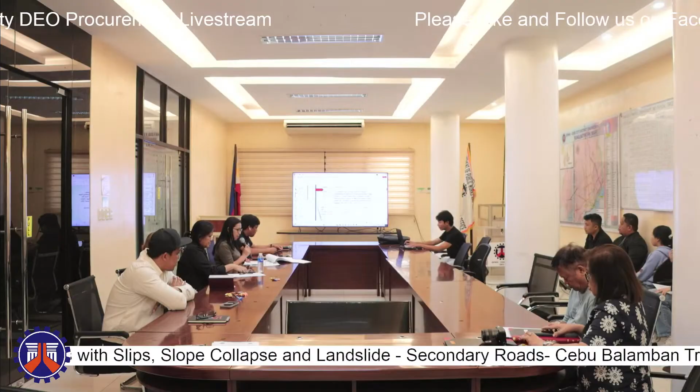For the BAC members, we have Maria Dolores B. Salazar, Maria Luz Di Benzuela, and Jafet M. Salara. For the BAC secretariat, we have Fritz Andrew G. Asignar, Winmar R. Pelenia, Sarabel Sulib, and Marilu T. Avila. For the technical working group, we have Kenny Luis Di Mansueto, Reynaldo B. Padillo. That's it, okay.

And Kenny, yeah, I've already mentioned Engineer Mansueto. Okay, so we have no visitors from the construction firms, probably online.

Okay, so we will now proceed with the discussion of the different contract IDs. May I request the programmers and designers.

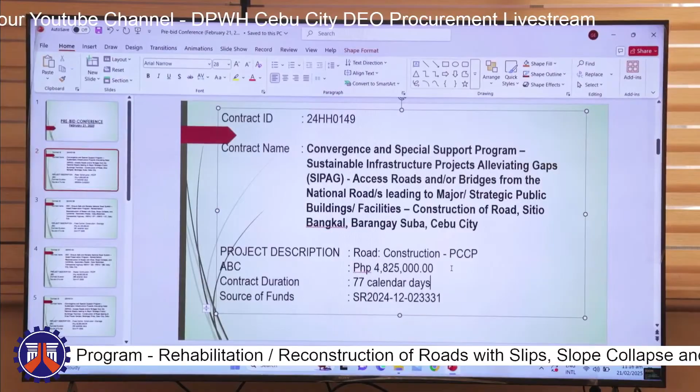Good morning, everyone. For the first project, we have construction of road in Barangay Suba, Cebu City, with contract ID 24HH0149, contract name Convergence and Special Support Program, Sustainable Infrastructure Projects Alleviating Gaps, SIPAG, access roads and or bridges from the national roads leading to major strategic public buildings, facilities, construction of road, Sitio Bangkal, Barangay Suba, Cebu City. Project description: road construction, PCCP, with an approved budget of 4,825,000 pesos, contract duration of 77 calendar days, and source of funds SR 2024-12-02-3331.

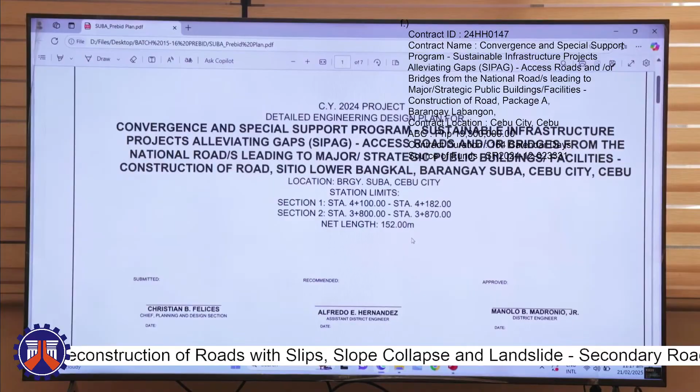For the major scope of works for this project, there are two sections. Section 1, station 4100 to station 4182, and Section 2 with station limits of 3800 to 3870, with a total net length of 152 meters.

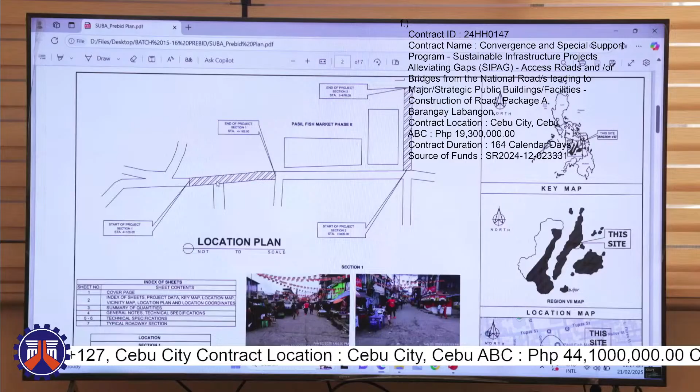For the second page, we can see here the location plan. The project is located near Pasil Fish Market Phase 2, in between Phase 2 and Phase 1. Section 1 is located at the Cebu City Fish Port. So here are the sections, Section 1 and 2.

For the major scope of works, we have surplus common excavation, pipe culverts and drain excavation, gravel fill, subgrade preparation, aggregate subbase course, PCCP with a thickness of 250 mm and 3 days curing period, and reinforcing steel, structural concrete, metal frames and gratings, reconditioning of drainage structures, manhole, and concrete cover.

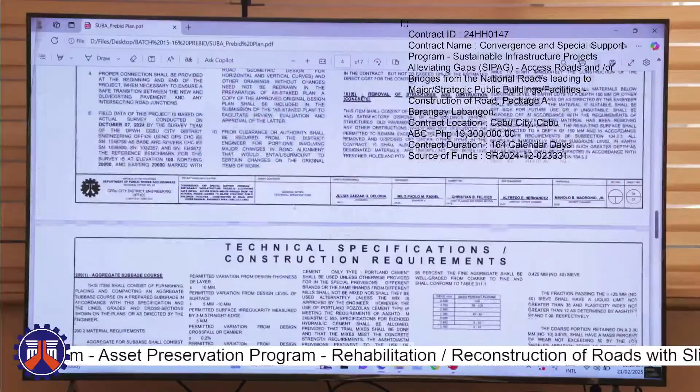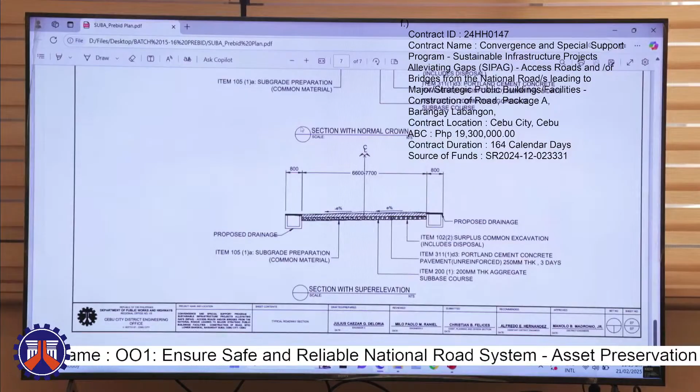For the next page, we have the general notes and the technical specification of every item. For the last page, we have the typical road section. The items included are item 1022 surplus common excavation, item 311 D3 for the PCCP with thickness of 250 mm, 3 days, and item 2001 aggregate subbase course. We also have the proposed drainage with a width of 800 mm. That would be all for the Barangay Suba Road Construction Project.

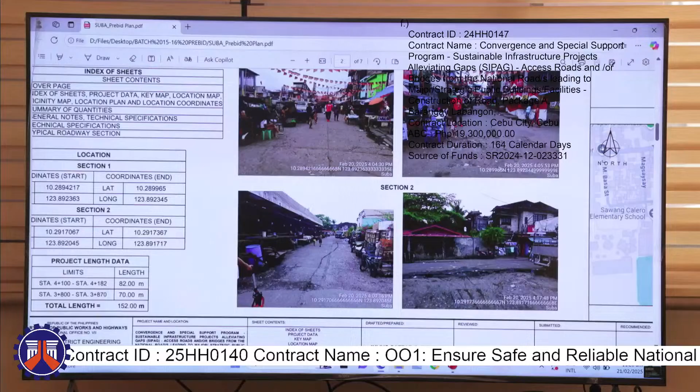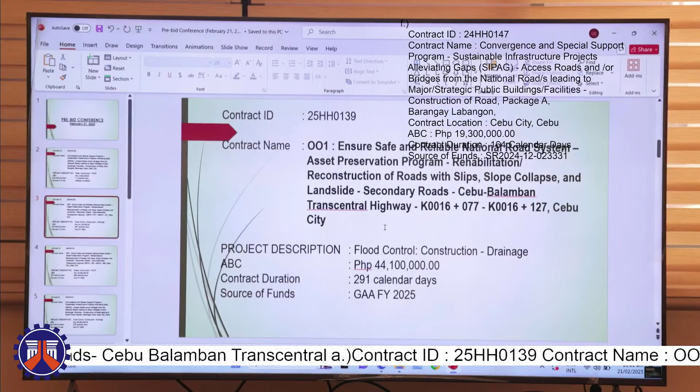Good morning. I'm here to discuss our next project with contract ID 25HH0139, contract name OO1 Ensure Safe and Reliable National Road System Asset Preservation Program, Rehabilitation, Reconstruction of Roads with Slips, Slope Collapse, and Landslide, Secondary Roads, Cebu, Balamban, Trans Central Highway, kilometer 16 plus 077 to kilometer 16 plus 127, Cebu City.

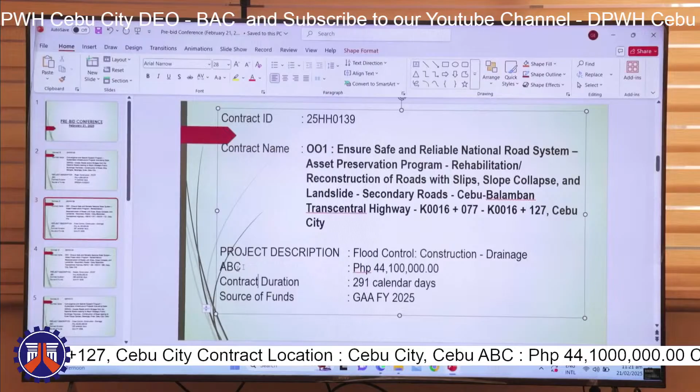Project description: this is a slope protection project. Our approved budget of the contract is 44,100,000. Contract duration is 291 calendar days. Our source of fund is GAA FY 2025.

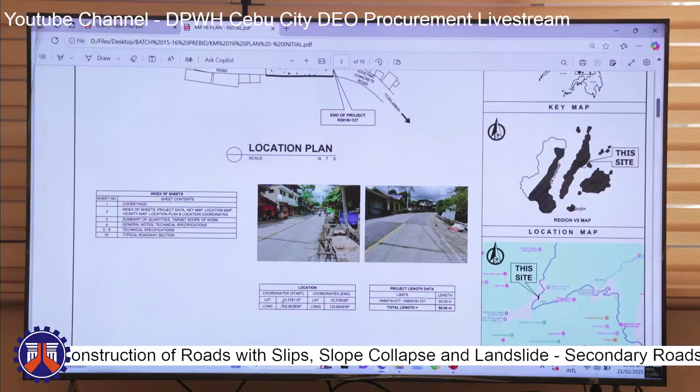This project calls for the reconstruction and rehabilitation of existing roads with slip, with the purpose that the foundation will lie on stable grounds, likewise utilizing the part of the slipped pavement alignment as the detour road. The target scope of work of this project is to remove the existing slipped pavement, reconstruct and maintain it as detour until the duration of the project, which is to be extended up to the end of the slip section to provide safety to the traveling public.

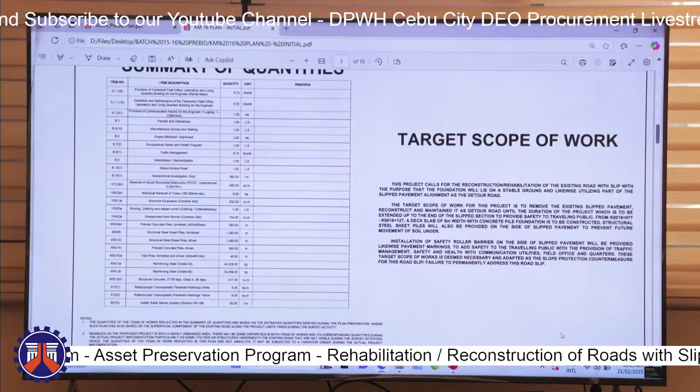From kilometer 16 plus 077 to kilometer 16 plus 127, a deck slab of 8-meter width with concrete pile foundation is to be constructed. Structural steel sheet piles will also be provided on the side of the slipped pavement to prevent future movement of soil underneath.

Installation of safety roller barriers on the side of the slipped pavement will be provided. Likewise, pavement markings to add safety to the traveling public, with the provision of traffic management, safety and health, communication utilities, field office and quarters. This target scope of work is deemed necessary and adopted as a slope protection countermeasure for this road slip failure.

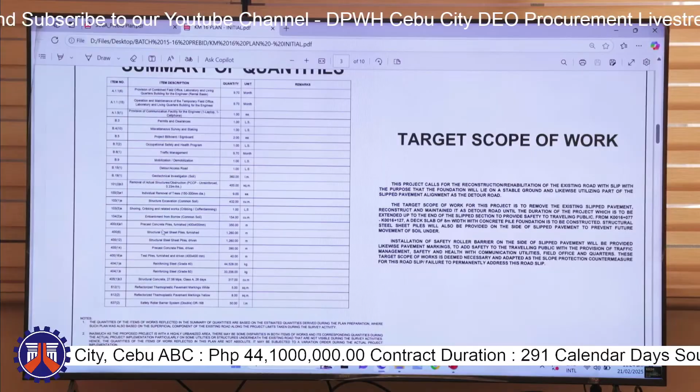This one, we have our precast concrete piles, this one, and structural steel sheet piles.

Next, we have our general notes and technical specifications. And lastly, our typical road section, this one.

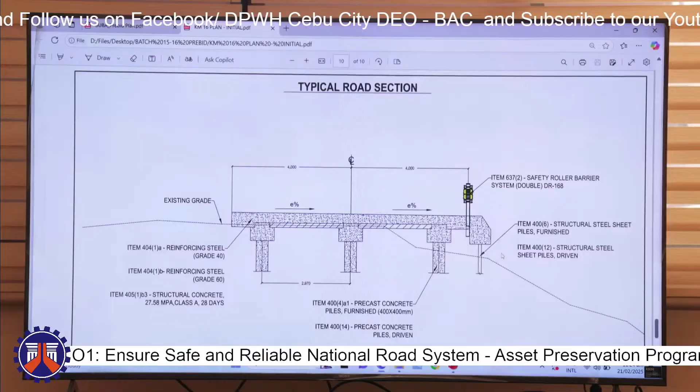We have our deck slab here at the top. This one, our concrete piles. Then we have our sheet piles at the side. Then we have there our safety roller barriers.

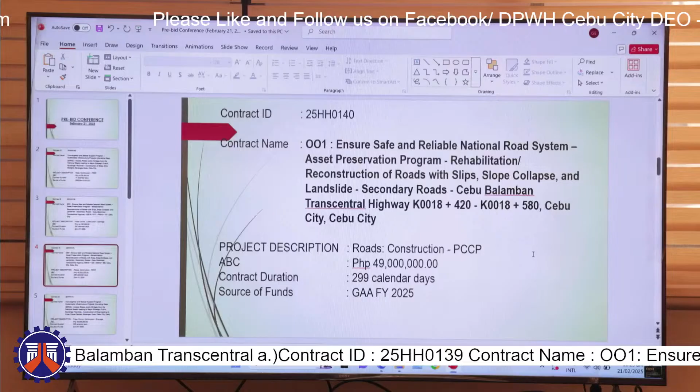The next project is contract ID 25HH0140 with contract name OO1, ensure safe and reliable national road system, asset preservation program, rehabilitation, reconstruction of roads with slips, slope collapse, and landslide, secondary roads, Cebu, Balamban, Trans-Central Highway, kilometer 18 plus 420 to kilometer 18 plus 580, Cebu City, with an ABC amount of 49 million. Contract duration of the project is 299 calendar days, and source of fund is GAA FY 2025.

So the net length of this project is 160 meters. Here is the project location of the project.

So the current condition of the site is, this project is a continuation of our 2021 project. So here are the not yet updated photos.

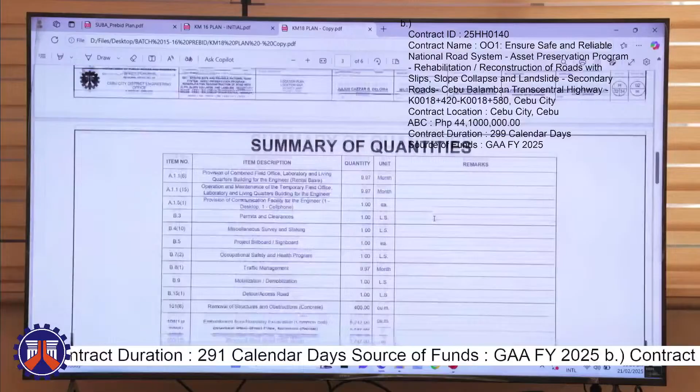For the summary of quantities, we have combined field office and operation and maintenance of the temporary field office, provision of communication facility for the engineer, permits and clearances, miscellaneous, survey and staking, project billboard, signboard, occupational safety and health program, traffic management, mobilization, demobilization.

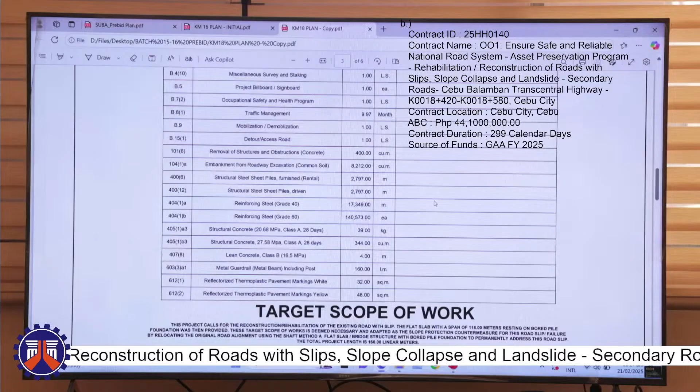We also have detour and access road, removal of structures and obstructions, embankment from roadway excavation, structural steel sheet piles driven, reinforcing steel, structural concrete, lean concrete, metal guardrail, reflectorized thermoplastic pavement markings.

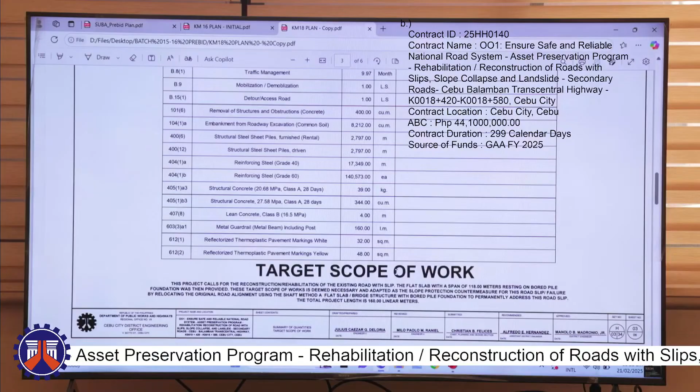So the target scope of work, this project calls for the reconstruction rehabilitation of the existing road with slip. The flat slab with a span of 118 meters resting on bored pile foundation was then provided. This target scope of work is deemed necessary and adopted as the slope protection countermeasure for this road slip by relocating the original road alignment using the shaft method and a flat slab bridge structure with bored pile foundation to permanently address this road slip. The total project length is 160 linear meters.

So this project, the CY 2021 scope of work is the bore piling. This project is the superstructure na siya, the flat slab na lang.

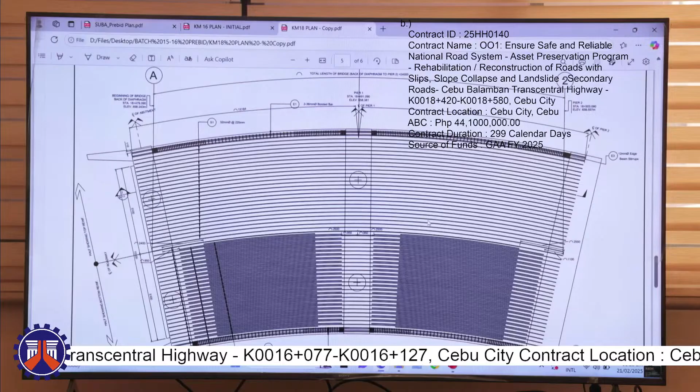So here's the general notes. The slab reinforcement. So here's the typical cross-section of the project.

So that's it for kilometer 18. Next one is...

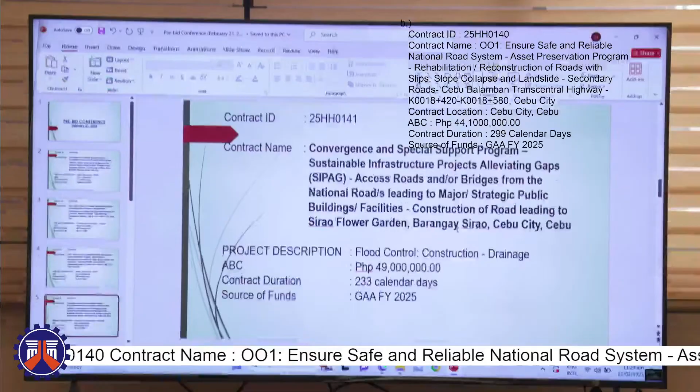Good morning, everyone. So I'm here to discuss the project with contract ID 25HH0141 with contract name Convergence and Special Support Program, Sustainable Infrastructure Projects Alleviating Gaps or SIPAG, access roads and or bridges from the national roads leading to major or strategic public buildings or facilities, construction of road leading to Sirao Flower Garden, Barangay Sirao, Cebu City.

Forgive us, but the project description for this one should be roads, construction of PCCP, with an approved budget of 49 million and contract duration of 233 calendar days, with its source of funds being GAA FY 2025.

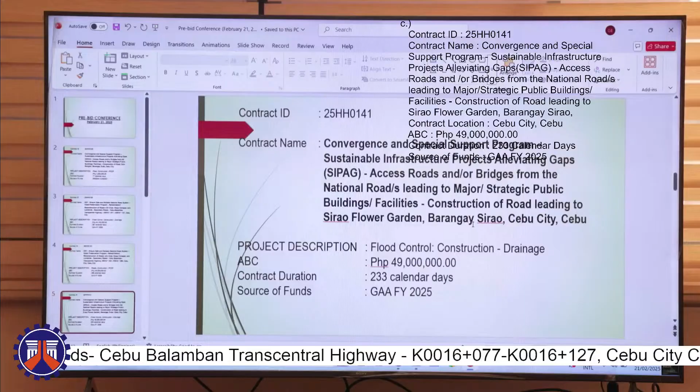So for our station limits, this starts at station 21,000 until station 21,962, with a net length of 962 meters.

Here you will see the location of our project. So basically this starts right before, or like this is the road leading to Sirao Garden, and it ends near Veco, just before the Sirao Flower Garden.

You will also see here the coordinates of the start and end of our project for easy navigation to our site.

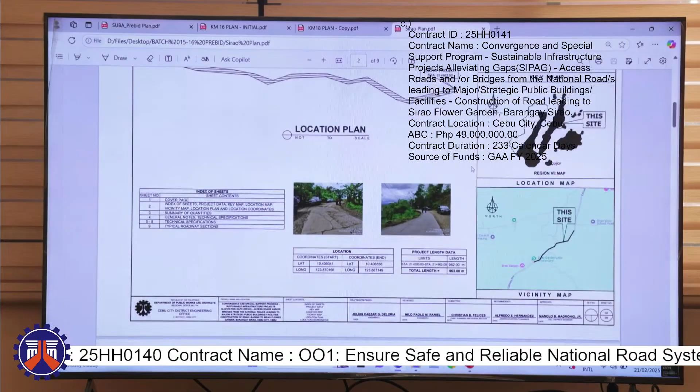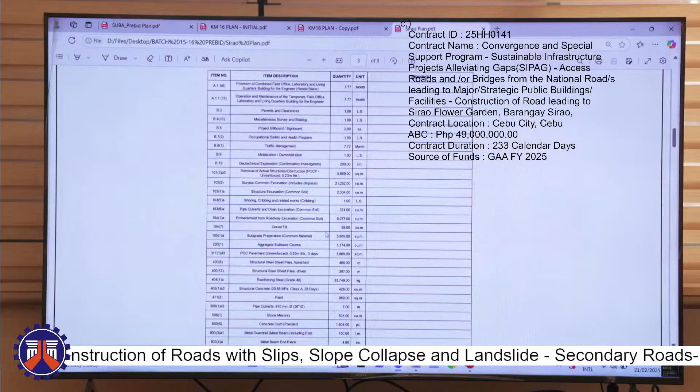So for the summary of quantities, we have here the major scope of works include removal of existing PCCP. It also has surplus common excavation, structure excavation, shoring, cribbing, and related works, pipe culverts and drain excavation, embankment from roadway excavation, gravel fill, subgrade preparation, aggregate sub-base course, PCCP 0.25 meter thick, 3 days curing, structural sheet piles, structural steel sheet piles driven, reinforcing steel, structural concrete, paint, pipe culverts, stone masonry, concrete curb, metal guardrail, and metal beam end piece.

So here are our general notes and technical specifications included in this project.

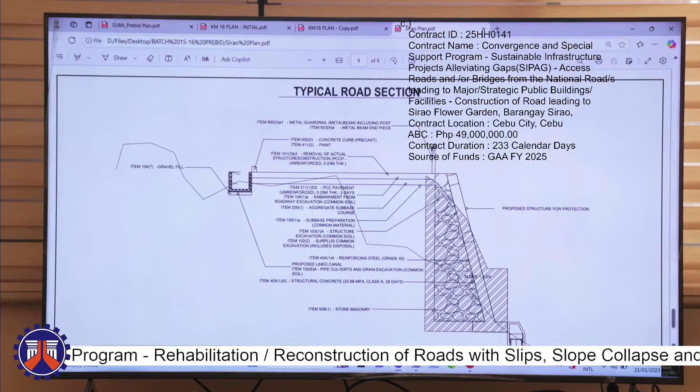And here is our typical roadway section. Basically, most of our project only includes construction of PCCP, but almost at the end of the project, we have slip protection going toward Veco. So you can see here we construct PCCP with lined canal on our left side and slip protection on our right side. Here, the stone for the protection as well as the structural sheet piles are furnished and driven right here. Other scope of works include reinforcing steel, concrete, and our proposed lined canal.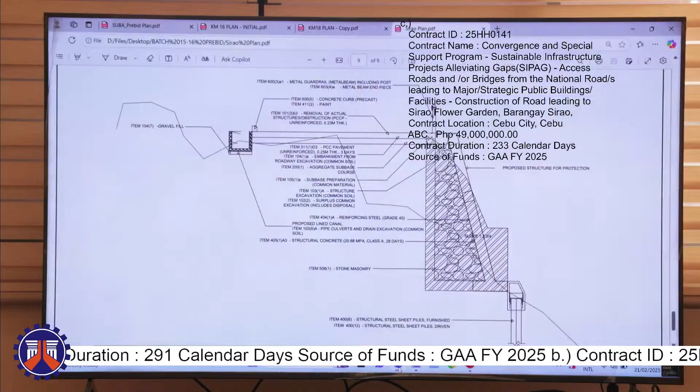Sir? Yes, sir. Concrete is already here.

So that's all for this project. Next project.

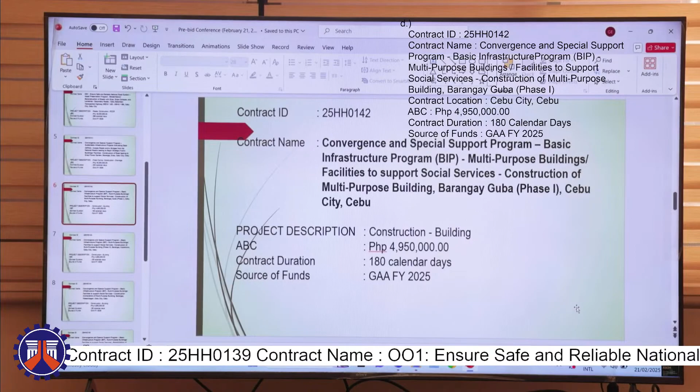Contract ID 25HH0142, with the contract name Convergence and Special Support Program, Basic Infrastructure Program or BIP, multipurpose buildings, facilities to support social services, construction of multipurpose building, Barangay Guba Phase 1, Cebu City, Cebu. Project description: construction of building. Approved budget of contract is 4,950,000, contract duration is 180 calendar days, and source of funds is GAA FY 2025.

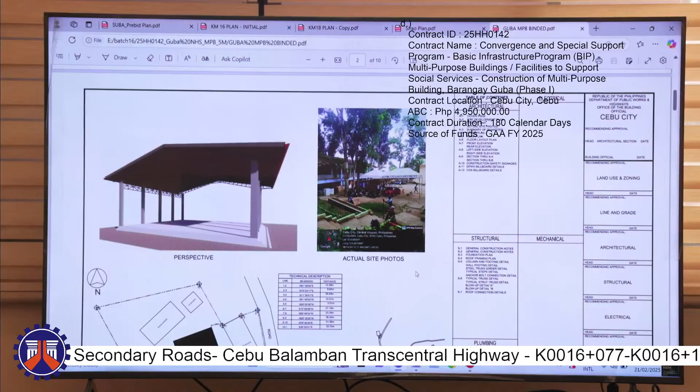So for this project, this is located at Barangay Guba National High School. The project is a construction of a covered court. This is the location. Its main scope of works consists of earthworks and structural works. The dimension of the covered court is 20 by 16 meters only, with 10 columns.

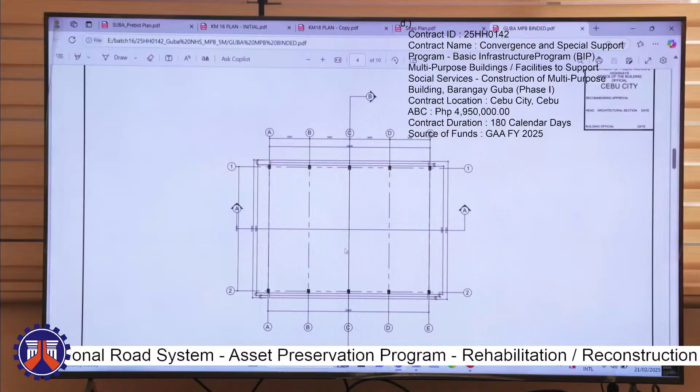There is an embankment since the floor there is not level. So there is item 8041B embankment. Then 901C2 structural concrete footings and slab on fill. Next is structural concrete columns. Then 902-1A structural reinforcing steel deformed bars grade 40.

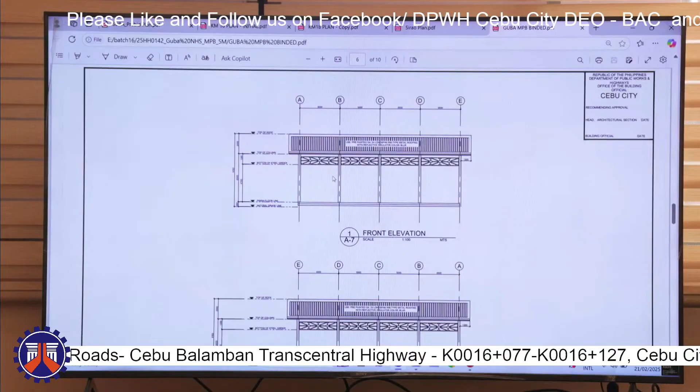Next, we have the roofing or finishing works: 1013-2A1 for the ridge roll, and flashing included and gutters, and pre-painted metal sheets or rib type long span. Also included is the structural steel roof framings, trusses, and truss girders. So that's all for Barangay Guba.

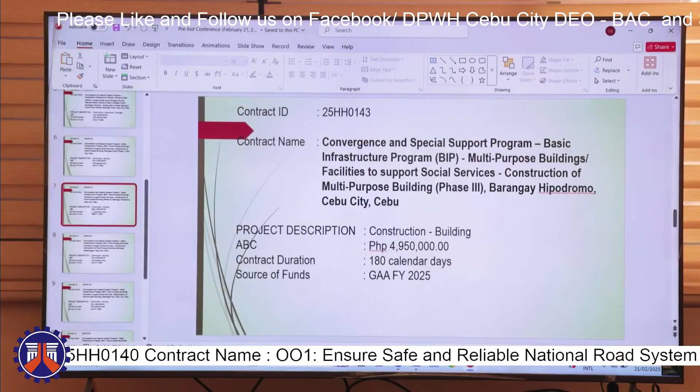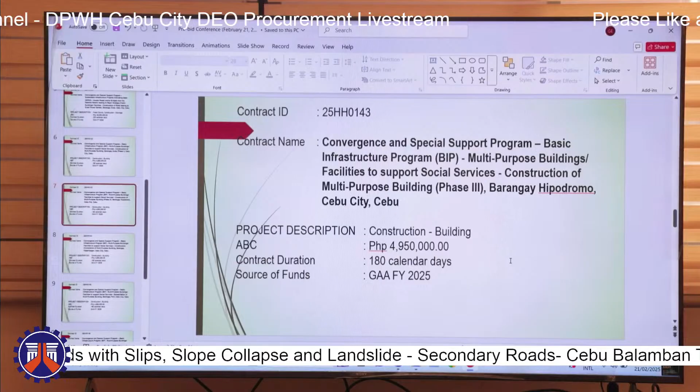Good morning. Next is contract ID 25HH0143. Contract name is Convergence and Special Support Program, Basic Infrastructure Program, Multipurpose Buildings or Facilities to Support Social Services, Construction of Multipurpose Building, Phase 3, Barangay Hipodromo, Cebu City, Cebu. Project description is construction of building, approved budget of contract is 4,950,000 pesos, contract duration of 180 calendar days, and source of fund is GAA FY 2025.

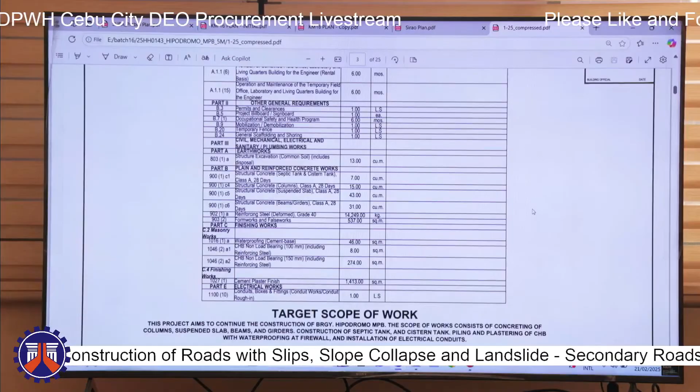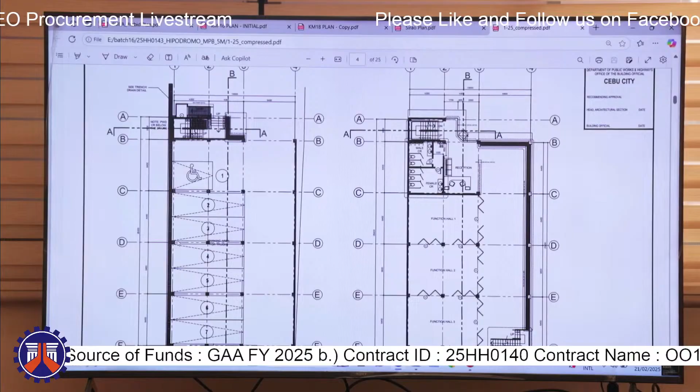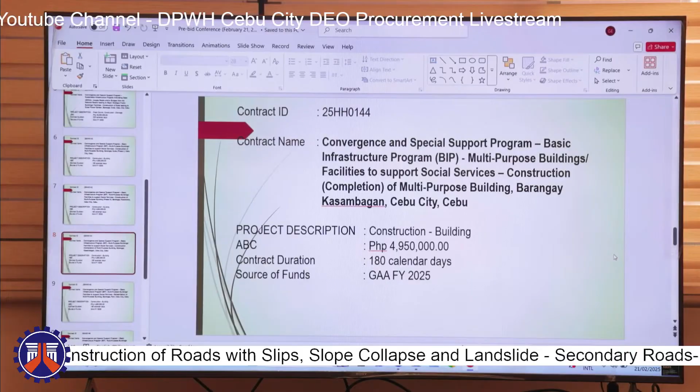Next, contract ID 25HH0144, with contract name Convergence and Special Support Program, Basic Infrastructure Program, Multipurpose Buildings or Facilities to Support Social Services, Construction, Completion of Multipurpose Building, Barangay Kasambagan, Cebu City, Cebu, with project description of construction of building, and approved budget contract of 4,950,000 pesos, contract duration of 180 calendar days, and source of fund is GAA FY 2025.

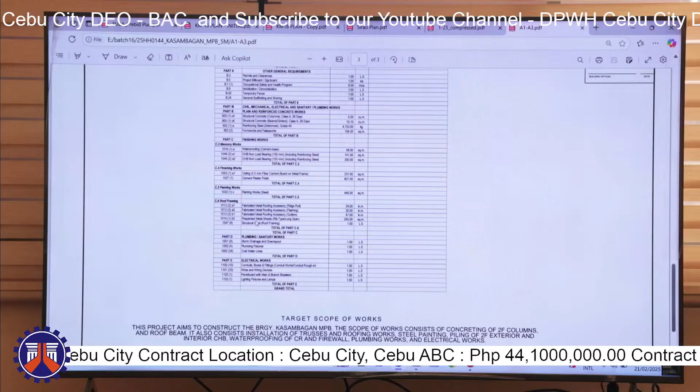This is also a continuation of the ongoing construction there in Barangay Kasambagan. The major scope of works consists of concreting of columns, beams, and girders at the second floor of the building, then plastering and waterproofing of CHB in second floor, then the roofing works, which includes trusses, ridge roll, flashing, gutters, and pre-painted metal sheets, rib type long span. Then the installation of downspout, plumbing fixtures at first floor and second floor of the building, and cold water lines. Also the electrical works, which includes roughing-ins, wirings, panel boards, and lighting fixtures.

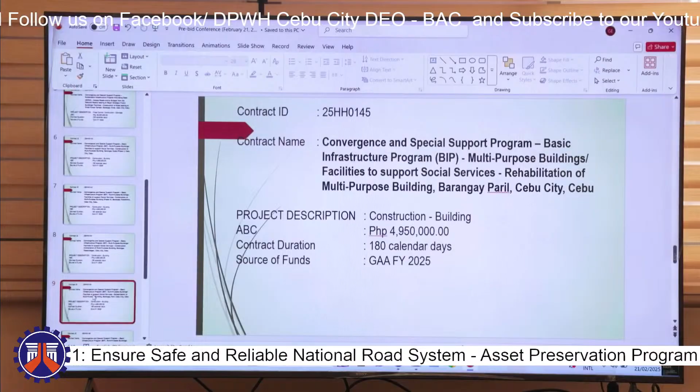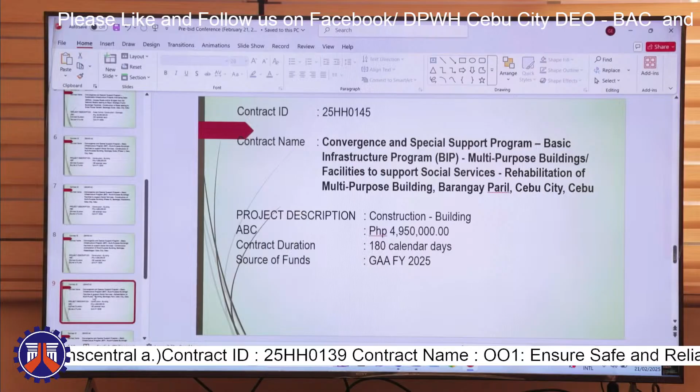Good morning, everyone. I will discuss contract ID 25HH0145, with contract name Convergence and Special Support Program, Basic Infrastructure Program, BIP, Multipurpose Buildings or Facilities to Support Social Services, Rehabilitation of Multipurpose Building, Barangay Paril, Cebu City, Cebu, with project description construction, building, and approved budget of contract 4,950,000, with contract duration 180 calendar days, and source of funds GAA FY 2025.

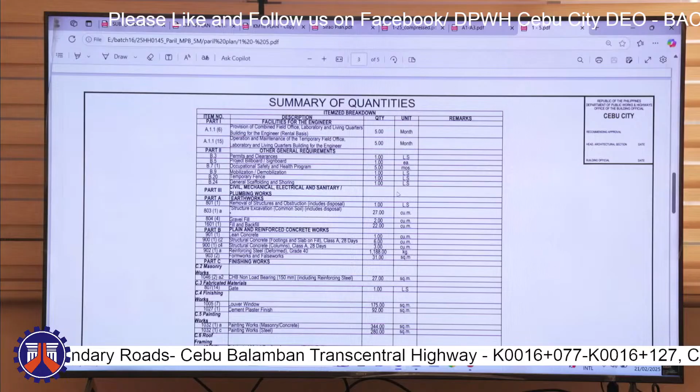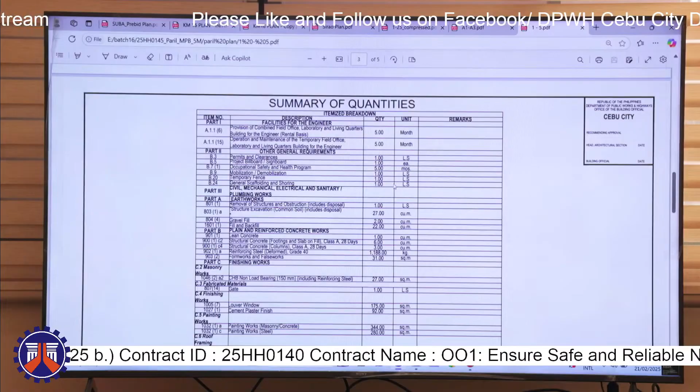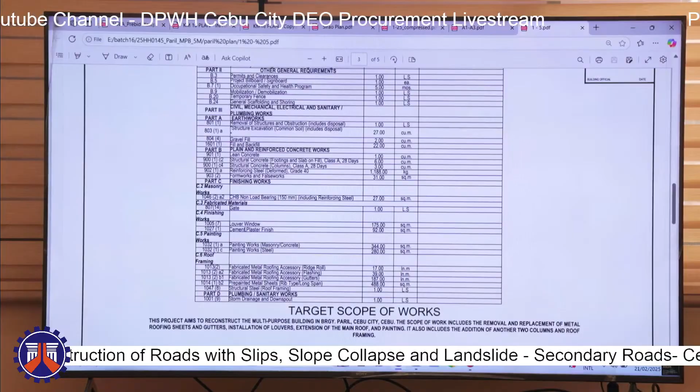This is the perspective and location of the project. For the summary of quantities, the major scope of work includes extension of the main roof and replacement of the roofing sheets of the canopy. That is item 1013-2A1, fabricated metal roofing accessory ridge roll; 1013-2A2, flashing; 1013-2B1, gutters; 1014-1B2 for pre-painted metal sheets, rib type long span; and 1047-8 structural steel. It also includes construction of 2 additional columns, item 900 C2 and item 900 C4, structural concrete columns. Then we also have the extension of the fence and replacement of the gate, installation of louvers, item 1005-7 louver window, and lastly painting works, item 1032-1A painting works for masonry or concrete, and 1032-1C painting works for steel. That's all for Barangay Paril.

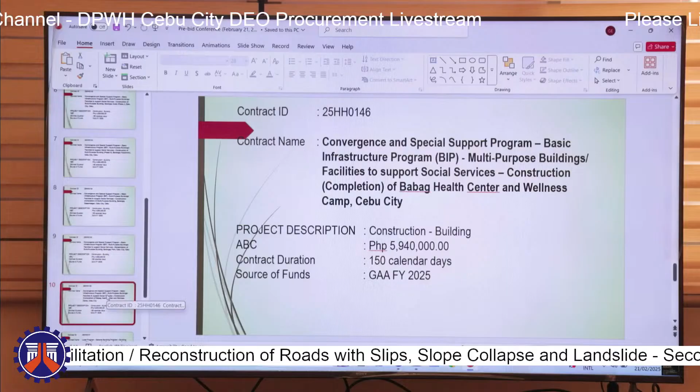Next is contract ID 25HH0146, with contract name of Convergence and Special Support Program, Basic Infrastructure Program, Multipurpose Building or Facilities to Support Social Services, Construction Completion of Babag Health Center and Wellness Camp, Cebu City, with project description of construction of building and approved budget of contract of 5,940,000, and contract duration of 150 calendar days, and source of fund is GAA FY 2025.

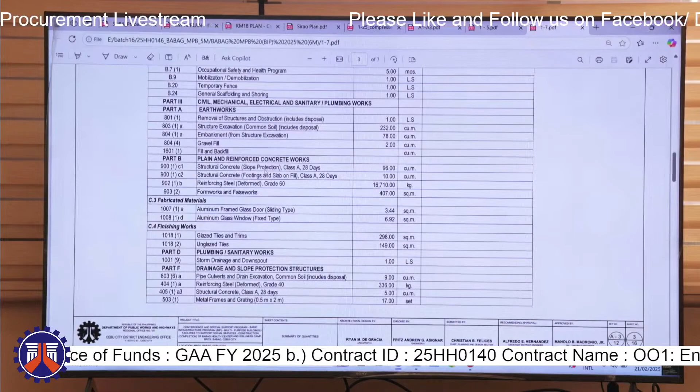So the major scope of works consists of structural concrete of slope protection with a length of 26 meters and concreting of open canal with 33 meters long. So this is the proposed slope protection at the site and the proposed open canal.

And it also includes the glazed tiles in this site and unglazed tiles in the comfort rooms and ramp. And also the fabrication and installation of metal frames and gratings for the open canal. That's all.

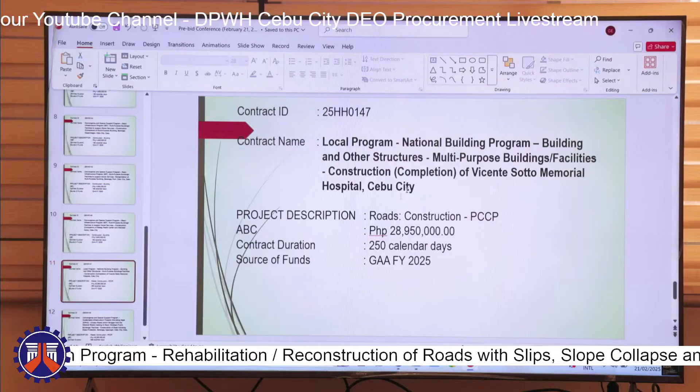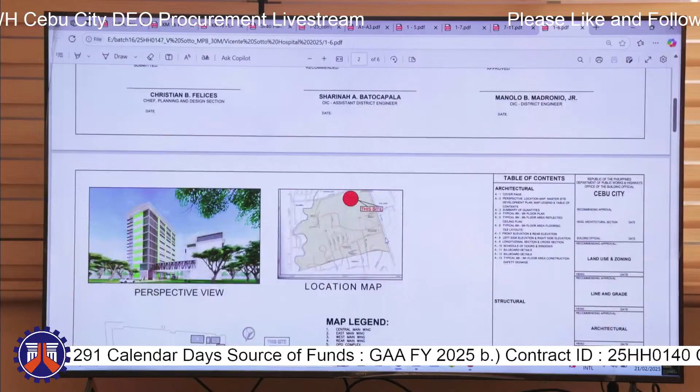Its main scope of works mainly focuses on the 6th floor to 9th floor level. This is a completion project currently existing on site now. So for 1016 1A waterproofing, this is located at the rear and the left side of the building, from 6th floor to 9th floor.

Next is the aluminum frame glass doors located at the 8th to 9th floor level also. Same with the glass windows, sliding type, fixed type, and awning type, all located at the 8th to 9th floor level.

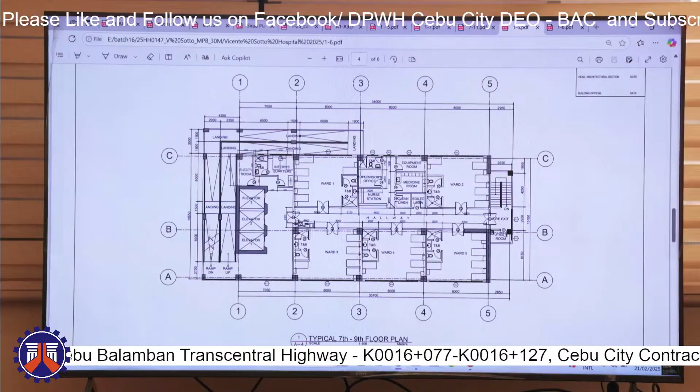And for the railings, we have the railings at the ramp side and the fire exit side. It's the same for the 7th to 9th floor as well. Next is the ceiling works, 10031A, located at the 8th floor and the 9th floor level, so the whole area will be installed with the ceiling and the painting works.

Next is glazed and unglazed tiles, same location, 8th floor to 9th floor. Glazed tiles for the common area and unglazed tiles for the CR or the comfort rooms.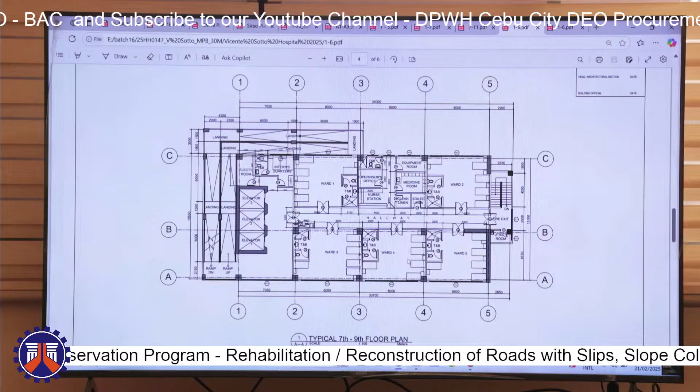And lastly is the installation of oxygen, nitrous oxide gas, manifold and duplex vacuum pump, medical air outlet, medical oxygen outlet, and medical vacuum outlet, all mechanical works to be embedded, from 7th floor to 9th floor level. And lastly is the installation of the air conditioning unit from the 8th floor to 9th floor. So that's all for Vicente Sotto.

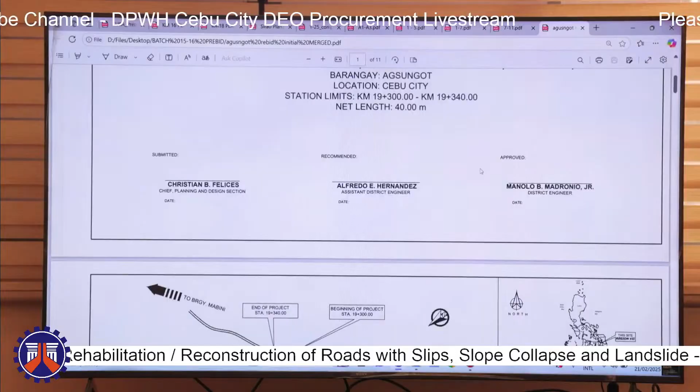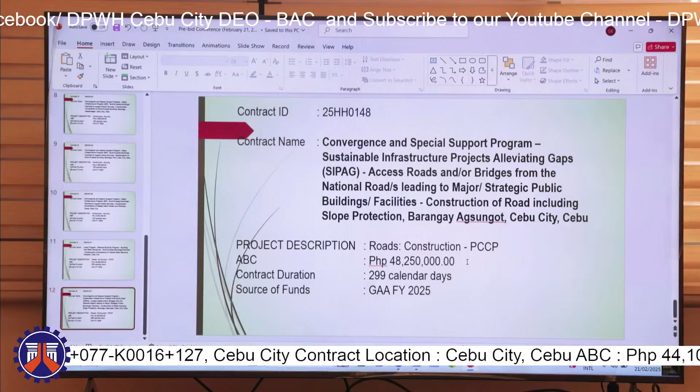Good morning everyone. With contract ID 25HH0148, Convergence and Special Support Program, SIPAG access roads and bridges from the national roads leading to major strategic public buildings, facilities, construction of road including slope protection, Barangay Agsungot, Cebu City, Cebu. The ABC of this project is 48,250,000 with a contract duration of 299 calendar days, and its source of funds is GAA 2025.

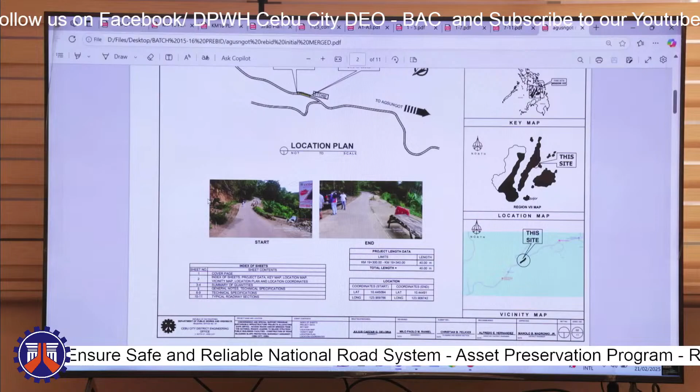So the station limits of the project is from 19,300 to 19,340, having a net length of 40 meters. Then the location map of the project. The project will provide slope protection at the left side and then slip protection at the right side, and we will also work on the PCCP.

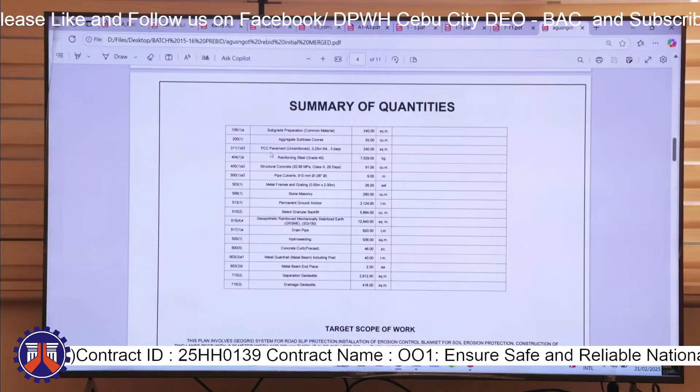As for the summary of quantities, we have the usual scope of works, and then for the major scope of works, we will provide detour or access roads, removal of existing PCCP, removal of structures and obstruction concrete, surplus common excavation, surplus excavation of hard rock, structure excavation, shoring and cribbing, pipe culvert and drain excavation, embankment, gravel fill, subgrade preparation, aggregate subbase course, PCCP 3 days 25 thickness, reinforcing steel, structural concrete, pipe culverts, metal frames and gratings, stone masonry, permanent ground anchor, select granular backfill, geosynthetic reinforced mechanically stabilized earth, drain pipe, hydroseeding, concrete curb, guardrail, metal beam end piece, separation geotextile, and drainage geotextile.

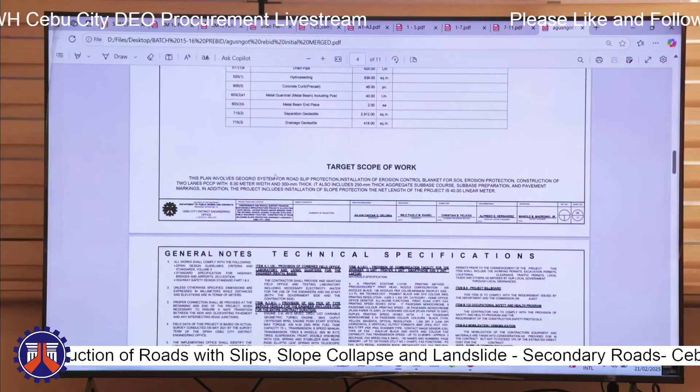For the target scope of work, the project involves the use of a geogrid system for road slip protection, installation of erosion control blanket for soil protection, construction of 2 lanes PCCP with 6 meters width and 300 mm thickness, and it also includes 250 mm thick aggregate subbase course, with a net length of 40 meters. So the following pages show the general notes and technical specifications.